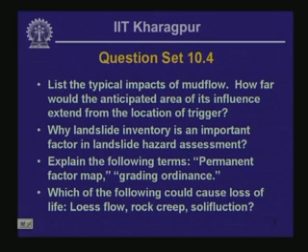Now let us get back to the steps involved in preparation of the permanent factor map. So this is an example here. You remember from the previous lesson that I was dealing with this particular issue. You have to combine all the factors that affect landslide possibilities in a given area and express the quantities as fractions associated with different types of units that have different types of hazard possibilities. So the factors in this particular example are as shown in the first bullet there.

These are all arranged in ascending order, and then you try several different classes. For example, if you have a very small proportion of a given land unit affected by landslides or underlain by landslide debris, we call it class 1. In the first trial, let's take the limits of permanent factors of 0.01 to 0.29 for that class.

Class 2 is intermediate landslide hazard, where the factors of the area affected by landslide or underlain by landslide debris range between 0.29 and 0.58. If more than 58 percent of a given area is underlain by landslide deposits or affected by landslide activities, we call it class 3.

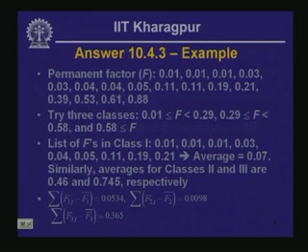Then we move to the next step. Here we sum up all three quantities obtained in the previous step, obtaining a double summation. Again the squares are missing here, so note there are squares in these terms within brackets. The result of this calculation is 0.0996.

Then we try new interclass boundaries. If you recall, we had boundaries at 0.29 and 0.58 in this trial. We try new interclass boundaries and carry through the same steps again to compute the double sum result obtained in the previous step, checking whether this number is going up or down. Our objective is to minimize the double summation quantity. Once we have obtained a minimum value, that is the interclass boundary that classifies the region into three zones of low, intermediate, and high landslide hazard.

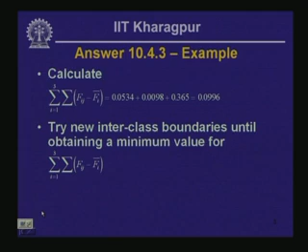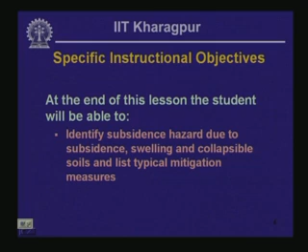That completes the question set of the previous lesson, and now we move on to the subject matter of this lesson. We want to be able to identify subsidence hazard, then hazards due to swelling and collapsible soils, and list typical mitigation measures for each of these individual hazards. There are three subtopics: subsidence, expansive soil, and collapsible soils, and we'll take these one by one.

First we consider the subsidence hazard, and let's look at the possible causes of subsidence. If you have any underground excavation or underground opening, that could be a cause of subsidence hazard, and an underground opening could be created as a result of underground mining activity such as longwall or room and pillar mining.

Now what happens in longwall mining: if you have an area underlain by economic minerals such as coal, a large area is gradually mined out, and the opening is allowed to collapse in a controlled manner. So longwall really allows the collapse of the roof of the mined out area, and as a result it also allows subsidence to develop, although in a controlled manner, at the surface at shallower depths, and the effect of this subsidence could extend to the ground surface.

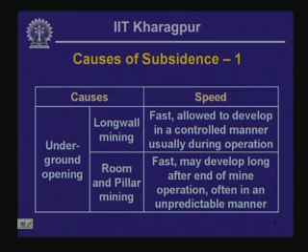But the problem here is, depending on the time of exposure, weathering, or other factors such as fire that spontaneously develops within mined out areas of abandoned coal mines, some of the pillars left behind during the original mining activity could eventually fail. Because of this, some subsidence could develop near the ground surface in a very fast and sometimes unpredictable manner.

So you really need to understand the difference between these two underground mining processes: longwall mining and room and pillar mining. In longwall mining you allow the subsidence to develop, but that is done in a very controlled manner, so the sequence can be engineered and the hazard because of subsidence can be managed. In room and pillar mining, on the other hand, the control is really not there that much.

There could be other types of underground excavation which also lead to subsidence, such as if a tunnel is excavated within a few meters from the ground surface, which could also cause permanent deformation at the ground surface.

Supported excavations and other types can also cause slow and predictable subsidence, and because the deformation is quite slow and predictable, this could cause damage to structures, but the loss of life in this particular case is minimal.

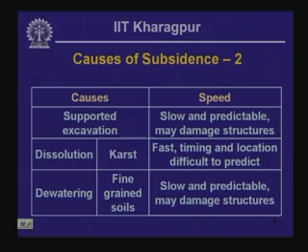But in some areas near the location of dewatering activity, properties could get damaged because of the relative displacement that could prevail across the particular structure in consideration. Because there is a possibility of uneven settlement, uneven subsidence, structures constructed near this location could be damaged.

You should realize that if the entire breadth of the area across the structure settles uniformly, there is very little possibility of damage to the structure, especially if the subsidence occurs at a slow pace. On the other hand, even if the subsidence occurs at a slow pace, if there is uneven settlement across the structure or building, there could be substantial damage caused because of the uneven settlement.

So these in a nutshell are the different types of agents that could cause subsidence, and their effects really about the nature of damage that could be caused because of these individual agents of subsidence. Now let us look at the features that could be caused by subsidence resulting from the causes we discussed in the previous two slides.

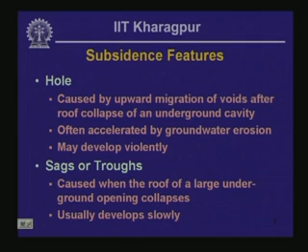Sags or troughs could also develop when the roof of an underground mined-out area collapses over a large areal extent because of the near simultaneous failure of a large number of pillars in case of room and pillar mining. So sags or troughs could develop because of long wall mining, as well as in areas underlain by abandoned room and pillar mines, if a number of pillars give way at the same time.

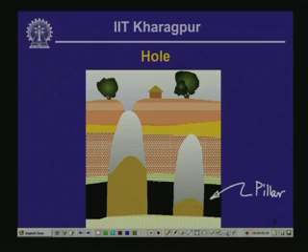Now this particular cartoon actually shows how a hole could develop. What is shown here is a pillar, as we explained a little bit earlier, and these are the openings. This one is an opening which is already mined out, and in this instance another opening, another mined-out opening, with another pillar here.

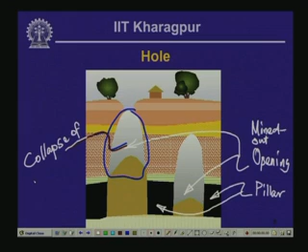So in this instance, what happened is the roof in this particular area collapsed. So the roof here collapsed, and that collapse of the roof of the mined-out opening led to the dumping of debris. This is the debris that got generated because of the roof collapse, and in the process a hole formed in this particular area. Now you can easily imagine, if this building shown here was nearer to the hole, then the building would have undergone severe damage.

Now there is a little bit of roof collapse for this particular opening as well, but the collapse is yet to daylight near the surface, and eventually there is a possibility of development of another hole in this area. You really do not know, it is difficult to predict how long it will take before a hole develops here. But what we can say is that the area shown in this cross section is in general susceptible to development of subsidence holes.

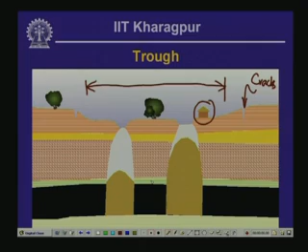Now, long wall and pillar mining allows this type of feature to develop in a very controlled manner, and engineers could actually sequence their mining activity in such a manner that the inhabited areas could be spared from this type of damage.

So, subsidence vulnerability—how do you actually assess subsidence vulnerability? To a large extent it follows from the discussion we already had regarding subsidence.

Areas underlain by shallow room and pillar mine workings are particularly vulnerable to subsidence, and there are instances of this type of subsidence in eastern India, in the coal fields of Ranigunj in western West Bengal and Jharia in the adjoining Jharkhand area. That area is affected by subsidence because of shallow underground room and pillar mining.

What complicated the matter in many of these areas is the burning of coal left behind from previous mining activities, and this burning is causing mine pillars that were left behind to collapse, and some areas in the Ranigunj and Jharia coalfield are sinking in a very unpredictable and disturbing manner.

Areas underlain by soluble bedrock or erodible deposits at shallow depths are also vulnerable to subsidence. Examples in the Indian context include Rewa and Raipur, where soluble rock is found within a shallow depth from the ground surface, and sinkholes develop quite frequently in those areas.

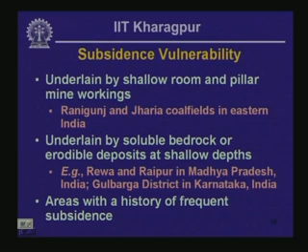Now, subsidence vulnerability is generally considered to be present in areas which have a history of frequent subsidence in the near past, as we have discussed earlier.

Now, what are the mitigation strategies to counteract the effects of subsidence? You can identify the areas where there are underground cavities. The cavities could be man-made, or they could be solution channels, caves, or caverns, because of groundwater movement through soluble bedrock.

Then you could try to predict the development of subsidence, as is a strategy in case of longwall mining. You could avoid or evacuate hazardous areas. Then there could be structural measures which include backfilling or grouting of underground caverns and cavities or mined out areas.

Then you could include some measures which can absorb compression, such as a perimeter trench. I'm just going to explain it in a little bit—just bear with me for a second.

You could also have a structural design so that the building is capable of absorbing a relatively large amount of differential settlement, but this measure could be quite expensive and could make residential development in the area unviable. Then you could have flexible utility connections connecting the building to sewer lines, gas connections, or telephone cables. These are the measures typically included in areas affected by subsidence.

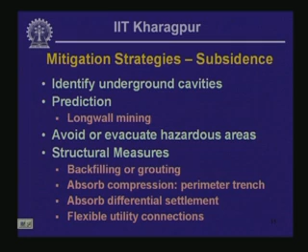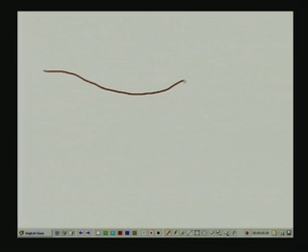But let me explain what I meant by the perimeter trench option, which I considered here. Let's say you have an area that you expect is going to be affected by subsidence of this nature, and the structure is out here. You can imagine that the soil layers, because of the development of this type of feature, the soil in this area is compressed towards the structure, and that causes many structural failures.

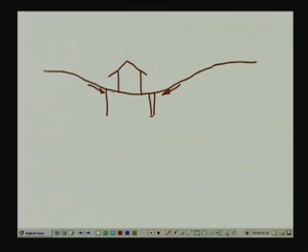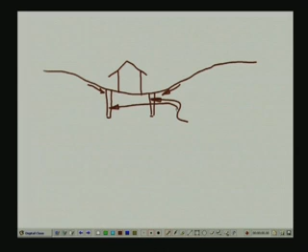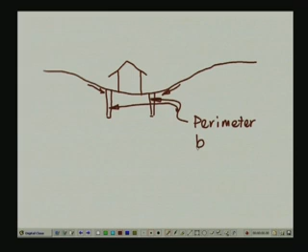So what is done in these instances is you dig a trench and backfill it with soft, compressible material such as loosely placed sand or other clay filling, other soil filling. These are the perimeter trenches, and we backfill the trench with compressible filling such as loose sand.

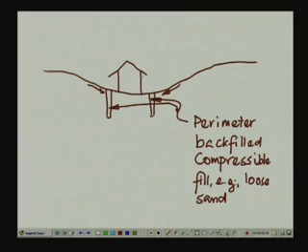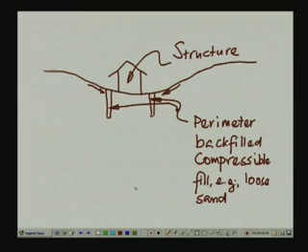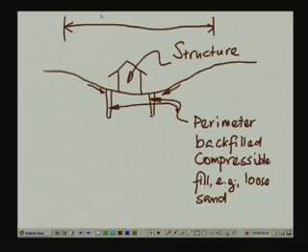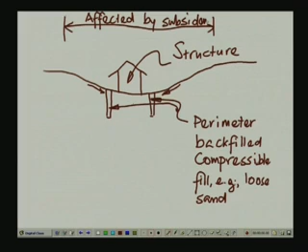Then, to a large degree, this controls the damage that could be caused to a structure within the zone of subsidence, because the compressible backfill within the perimeter trench is going to accommodate the amount of compression that is observed within the area affected by subsidence. So this is the area affected by subsidence. That is the function of the perimeter trench.

Now, the next topic is shrinking and swelling soils. What kind of geological setting is readily associated with shrinking and swelling soils? Smectite minerals and sometimes illite minerals. If there is an abundance of smectite and illite clays, that is an area you should watch out for as far as swelling and shrinking is concerned. Weathered rock containing clay minerals is also susceptible, because weathering of many types of rocks leads to the development of clay minerals, which leads to an expansion in the volume of the material, causing swelling.

Examples of typical geologic settings affected by shrinking and swelling are as follows: clay shale, clayey siltstone, sandstone, and black cotton soil.

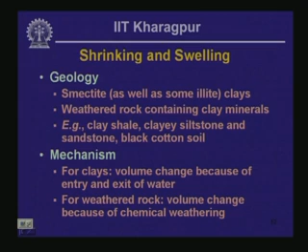Now let's look quickly at the mechanism that leads to the development of shrinking and swelling. For clays, there is a volume change triggered by entry and exit of water in between the plate-like particles discussed earlier. For weathered rock, volume change is initiated by chemical weathering of rock-forming minerals, which leads to the formation of different types of clay minerals, causing volumetric expansion. That's why an abundance of smectitic and illitic clay minerals in an area means you can expect a lot of swelling and damage related to swelling and shrinking.

Now, this is an example of the consequences of shrinking and swelling. Typically the process is quite slow in many situations because it requires entry and exit of water into the matrix of fine-grained clay particles. The process generally occurs at a slow pace, and this could lead to severe damage of property, but usually the possibility of loss of life could be discounted.

Now, on the right I show a picture of an office complex in southwestern West Bengal, which is underlain by swelling soil. Here you can see that the portion of the building towards the left has separated from the portion towards the right. What is happening is that the soil is pushing in this direction, which is splitting the building into two different parts. This crack here is approximately 200 to 250 millimeters in this particular case.

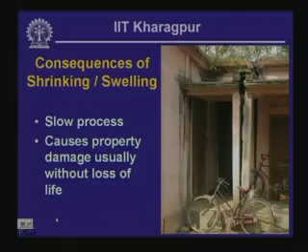Shrinking and swelling hazard is largely accounted for by identifying the hazard and accounting for the possibility of shrinking and swelling. Hazard identification typically involves identification of mineralogy and clay content. Usually the greater the clay mineral percentage.

Plasticity index and stiffness, the greater is the swell potential. Soils affected by swelling exhibit an appearance of popcorn. If you look at the natural surface of shrinking and swelling soil, it often takes the appearance of popcorn, just like the surface of a cauliflower. Then we need to assess the engineering behavior of the soils likely to be affected by shrinking and swelling, and there are many correlations available which allow the engineer to estimate the pressure that could come onto a structure to be constructed on swelling clay.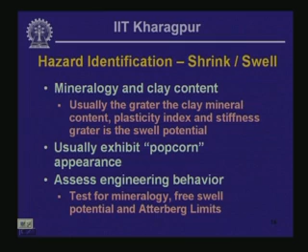This pressure arises during shrinking and swelling because of water ingress and egress, estimated from the mineralogy and from Atterberg limits. We are going to look at how we actually quantify or classify the shrinking and swelling tendency from Atterberg limits of soils, shown in this table. Generally, high shrinking and swelling is associated with soils that have a liquid limit greater than 60%. You should look back at your previous notes to check what is meant by liquid limit.

And the plasticity index of soils that are characterized as high swelling and shrinkage potential typically ranges above 35%. When you have a very low liquid limit, typically smaller than 35%, or small plasticity index, typically smaller than 12%, it is assumed there is no shrink-swell potential. There are two more classes in between: medium shrink-swell potential and low shrink-swell potential, as shown in this table.

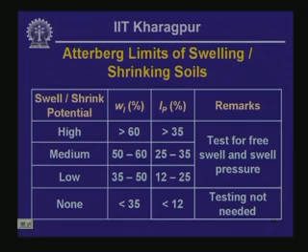Now, if you ascribe some shrink-swell potential to the soil at a given location, you need to do laboratory testing of the material, bringing a sample of the soil to the laboratory and testing it to quantify how much swell pressure could be associated with the deposit, or how much pressure a structure will encounter because of entry and egress of water into the soil underneath it. Once that is ascertained, special structural design can accommodate the amount of movement, or ground modification may be required to minimize the entry and egress of water, which is the prime cause of swelling or shrinking in the first place.

That leads us to the mitigation strategies typically associated with shrinking and swelling. First, as usual, the first mitigation strategy is to avoid the areas affected by shrinking and swelling, but that is not always possible, so we have to move on to other mitigation measures.

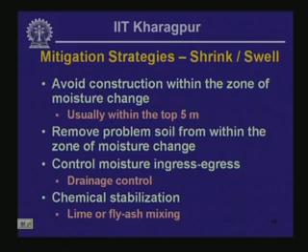The final topic we are going to look at is collapsible soils. Collapsible soils are those that collapse without any additional loading, because of wetting. When water gets entry into the soil, the structure collapses. This type of soil is often found in arid or semi-arid climates. Typically, soils that have weak interparticle bonds, such as those from deposition of salt or calcium carbonate at the grain contact, get classified as collapsible soil.

The mechanism that leads to collapse is as follows: the soil structure collapses when entry of water dissolves the weak cementation bond, and that causes the collapse.

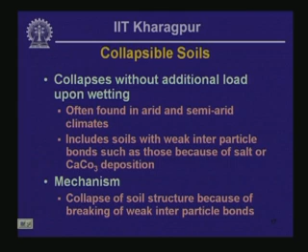As we did for shrinking and swelling soils and rocks, we are going to try to identify the hazard associated with collapsible soil. Collapsible soils may occur in climates other than arid or semi-arid, but they are more abundant in areas that are arid or semi-arid. Collapsible soils are typically dry, usually light colored, with liquid limit typically below 45%, plasticity index typically below 25%, and void ratio typically above 0.7.

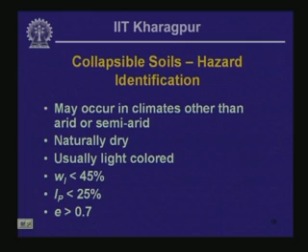Mitigation strategies to avoid problems associated with collapsible soils: if collapsible soil is encountered at shallow depth, it is imperative that the soil is not allowed to get wet, or pre-wetting is done before any structure or facility is constructed, followed by heavy compaction of the soil before construction of the structure, building, road, or other facilities.

If collapsible soil occurs at great depth, then what could be done is to go for deep foundation that transfers the load of the structure to a layer underneath the soil that may be affected by collapse because of entry of water.

In this case we could also go for chemical stabilization, and typical procedures involve treatment of the soil with sodium silicate and/or calcium chloride solution, which reinforces the weak cementation bond and gives some permanence to the strength of the interparticle bond.

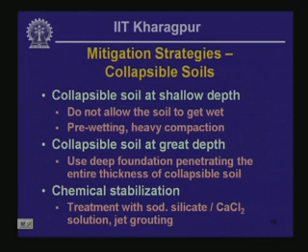Alternatively, we could also go for jet grouting, which involves pumping grout material—cementitious or other grout material—at great pressure to reinforce the interparticle bond as well as to compact the potentially collapsible soil. So these are the typical mitigation strategies often used for collapsible soils.

Now we have come to the end of this lesson. To summarize what we learned: we looked at a list of features associated with subsidence and how the features develop, nature of subsidence hazard and mitigation strategy, identification of hazard related to swelling and collapsible soils, and we also looked at mitigation strategies to account for hazards related to swelling and collapsible soils.

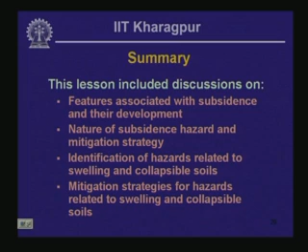We end this lesson with a question set. The first question asks whether the following statements are true or false. The first statement is: swelling soils are found only in desert. The second one is: collapsible soils are usually dry.

Second question: can a clay-silt soil of high plasticity be typically classified as collapsible soil? Third question: can a soil with high swell potential be classified as CH? You should look back to your earlier notes in this course to answer these. Fourth question: explain the following terms, sinkhole and trough. And finally, list the typical mitigation measures against subsidence hazard.

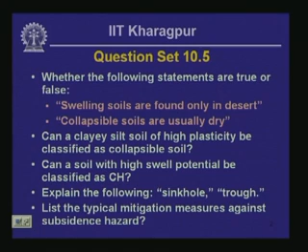This is the question set of the previous lesson. The first question that was asked was whether the following statements are true or false. The first statement was: swelling soils are found only in desert. This is more often than not true.

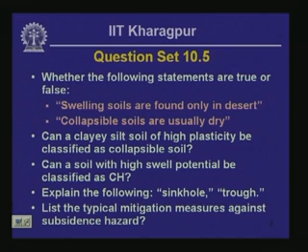However, swelling soils are also found in non-desert environments, particularly in fine-grained soils where there is a lot of smectite minerals present. Swelling soils could also be present in situations where there are a lot of clay minerals between rock joints. In such situations also there could be a lot of potential for swelling in the shallow layers near the ground surface. These geologic settings are not necessarily found only in desert; they are also found in other hydrometeorologic environments.